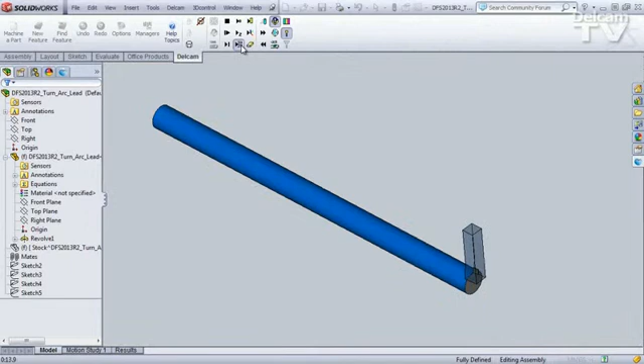So as you can see here in the example, we're going with the longer part that I'm going to be finishing in sections. So let's take a look at what I've programmed so far. I have rough and finish of a face feature, and then I'm roughing a turning pass, but only back to a left boundary. I've got some sketches in here that I've used as left and right boundaries, you can see right here in the list. So there's the rough, and then it finishes back almost to the same point, again a different left boundary.

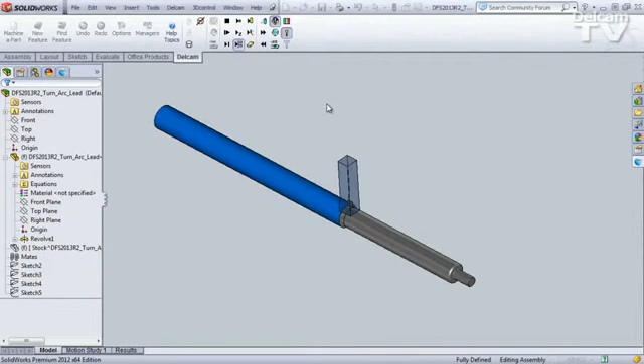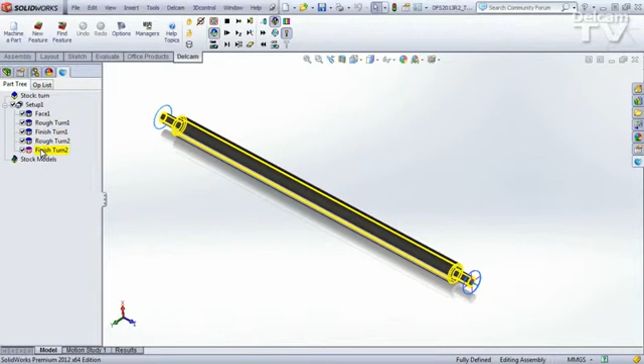And then in this example you might have a bar feed or a bar pull, maybe support the part with the sub spindle, and you'll rough another section of it and then finish that other section. So we've got overlapping finish passes here in the middle. Okay, and here you can see the sketches are just points that I've used. So for all of these turn features I'm using the entire profile, but I have these sketches I'm using as left and right boundaries to contain the toolpath to only certain portions of the length of the part.

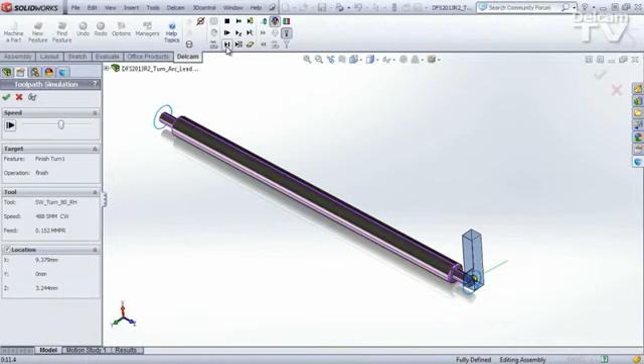Okay, let's look at this in some centerline toolpath. I'll turn off the rough and the facing, and I have all these split into separate features. So here comes the first finish pass. I'll just let it play. And then the second finish pass comes in. Now in reality you've got the first finish pass and then maybe a bar pull, more roughing, and then the second finish pass.

But take a look at this toolpath. First of all, after the first finish pass is complete, it goes away and does some other work. It comes back and it rapids straight onto the material. Well, that's not really a product of being a linear lead-in. That's not the problem there. The problem is the engagement angle. So let's fix that first, and then we'll take a look at the arcs.

So if we go to the op list and the second finish turn and look at the attributes, you can see here, first of all, we have a new leads section. We've got it broken off by itself now. We're doing a linear lead-in. It's really not why it rapided into the part, though. It's the engagement angle. So if I set this at something like 30 degrees, you'll see a big improvement here.

There's the first finish pass, and remember again it goes away, it does a bar pull, it does another rough pass, it comes back and does another finish pass, and there's the 30-degree lead-in. So that is an improvement there, and that's what you could do before. It's still linear lead-in, but at least now we're not rapiding into the work. Okay, now let's replace all of this with arcs.

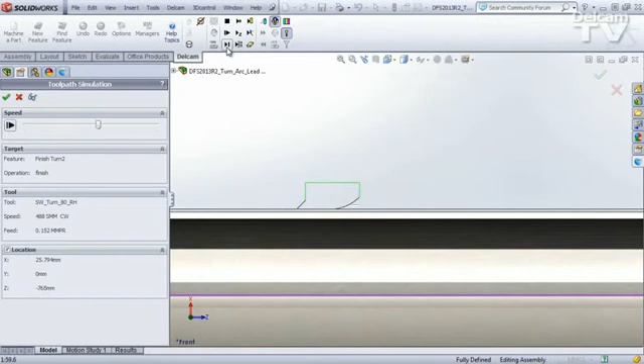Edit the attributes, go back to this leads section, and we have different lead styles here. We have linear and arc. When you have arc selected, you're given an arc in angle, and you have an arc in and out radius. Okay, I'll just start with that one. Hit OK. Play the first one. It hasn't changed. We go away, we bar feed, we rough, we come back and finish, and there you can see the nice arc lead-in to get a better blend.

So to make this even better, I'll go back to finish turn 2, go to the attributes and maybe tell it to arc out, and let's make sure finish 1 also arcs out. So we go back to the attributes, into the lead section, lead out with an arc.

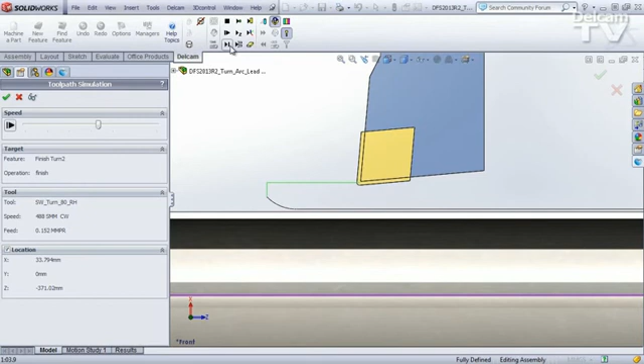Okay, so there's the first finish pass coming across, arcing out. We go away, a bar feed and a rough, and then the last finish pass, and we get a better blend there. So hopefully being able to lead in and lead out with arcs will help you cope with situations like this much better.